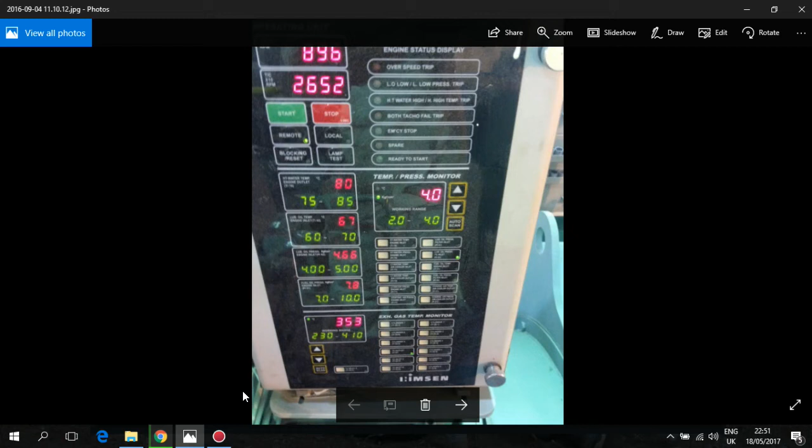Today it's 18th of May and I have this video for you. These photos were sent from my dear friend Radoslav from Bulgaria, and they're very nice pictures because this kind of local panel I have never seen, my dear friend. It's very nice to see the future in front of my eyes.

And it's very nice, this panel, because it's more durable. There are no pressure indicators shown by gauges. It's more durable, this kind, but I don't know in the future with the high temperature how this monitor will go. Only this electronics is sensitive to high temperatures, humidity and vibrations.

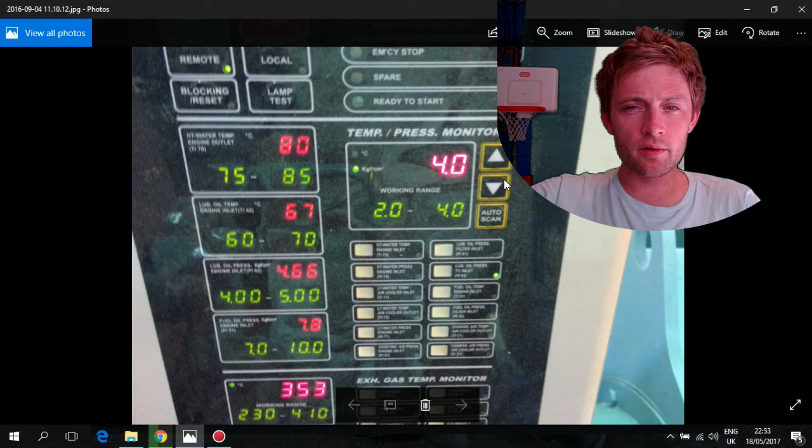As we can see here, you can also control the temperatures and pressures from here, from these two buttons. And now also it's in remote control. That means everything is in automatic, and we can see the temperature, which is 80 degrees and has variation from 75 to 85.

Lube oil temperature engine inlet is 67, and the range is 60 to 70. Lube oil pressure, kilograms per square centimeter, engine inlet is 4.66 and the range is 4 to 5. In the old ones, gauges had a small indication with a green area, which means that this is the proper operating pressures and temperatures.

But here also with green you can see very nicely the working ranges. Here down it's more clear, it says working range. It's very nice this. Also you don't need to see with your eyes how much the pressure or the temperature is. This one is better.

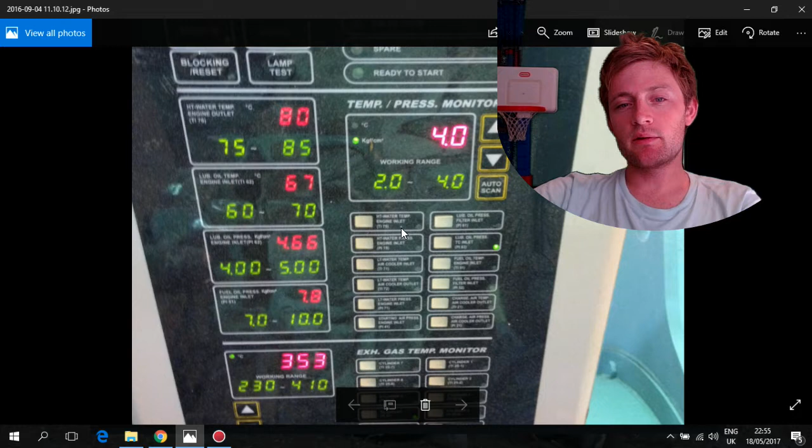Also, what is this? Lube oil pressure, temperature, inlet. If we have a lamp here, this is green color. That means in this panel here we see the lube oil pressure at the turbocharger inlet. And as we change here up or down, we can see different information. It's really nice to see something like that.

Thank you very much, Radoslav. Thank you very much, because it's a very nice opportunity to see the future.

And RPM, I see RPM is 900. Very nice, very strong diesel generators. Turbocharger speed is 2652 multiplied by 10, that means 26,520 rpm. The engine is at load.

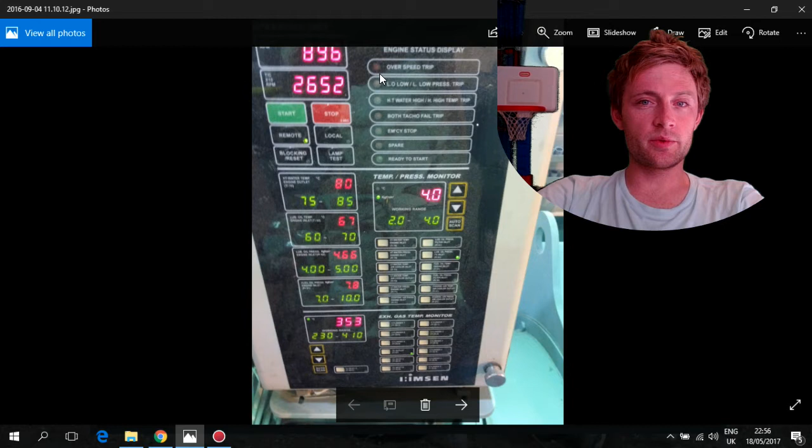Also we have indication of engine status here. We can see some lamps which indicate some status of the engine. If overspeed occurs, the engine will trip and this lamp will be lit. Okay, let's move on to another picture, but very nice. I like it. You will tell us in the future what you will face with that system.

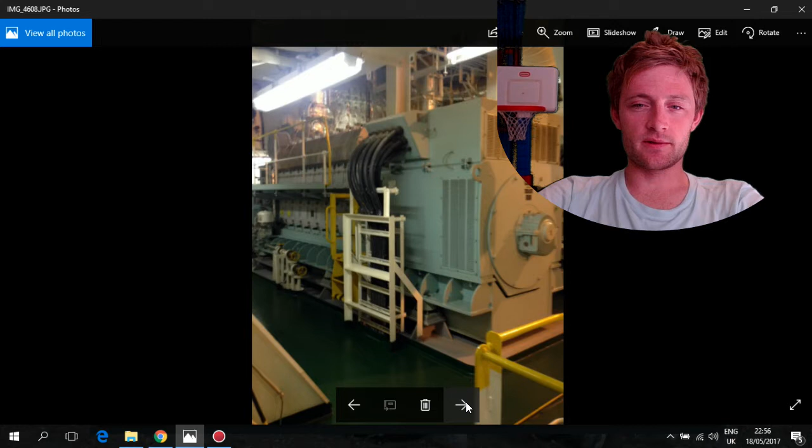And this is the generator from the outside, from far. As you can see, there are a lot of cylinder heads here. How many? 1, 2, 3, 4, 5, 6, 7, 8, 9. Maybe it's 9. Himsen made. They're all the same type, only the size changes.

From here I can determine these two valves are from the lube oil purifier, the inlet and the outlet. And also I can see this is the centrifugal filter here, this side. It's very good to have a centrifugal because most of the impurities will be removed there. Here these are the lube oil filters, also this side, and the air cooler is here.

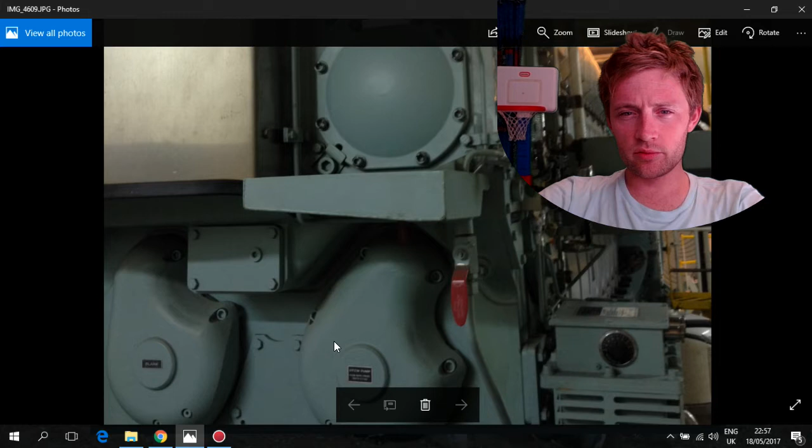They changed the design a little bit. These covers they made more beautiful. Sure, the design will be more detailed now after a lot of years of running this engine. As I know, these engines have already passed maybe 15 years, maybe more. From 2006 I have seen them installed in ships

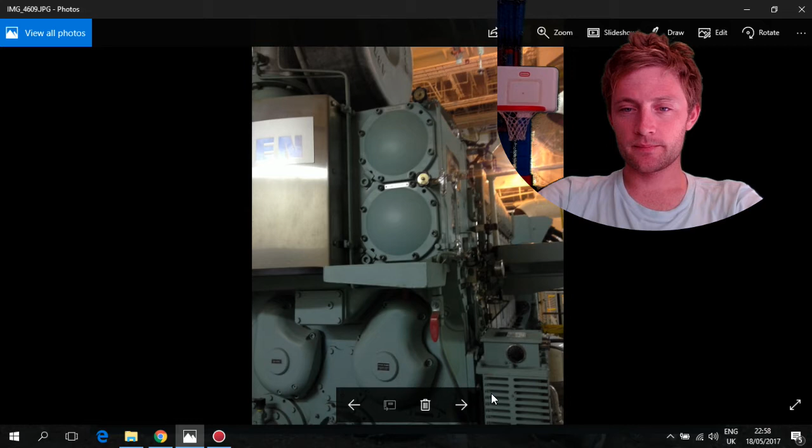as auxiliary engines. This is the preheater here for the water, the electrical preheater of the generator, and these are the centrifugal pumps here for high temperature and low temperature water.

These filters, the upper and the lower, are interchangeable. You can change them if the alarm comes, the low lube oil pressure alarm, maybe set at about 3.8 or 3.6, 3.5, something like that, maybe lower. If the alarm comes, you change to the other filter, but be careful because sometimes the filter changeover is not done properly and some of the oil keeps passing and will not stop.

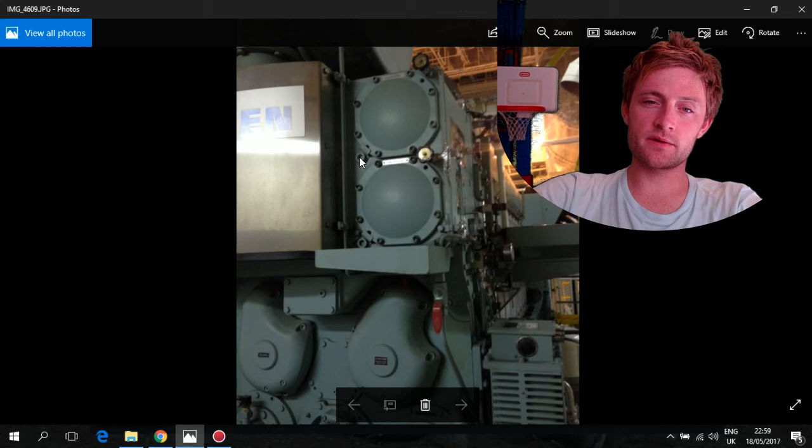First open the vent. Let's say the upper is dirty, you change to the lower filter, and you open the vent. If you see that the oil stops, it's okay, you can open this bolt here and remove the last remaining oil inside.

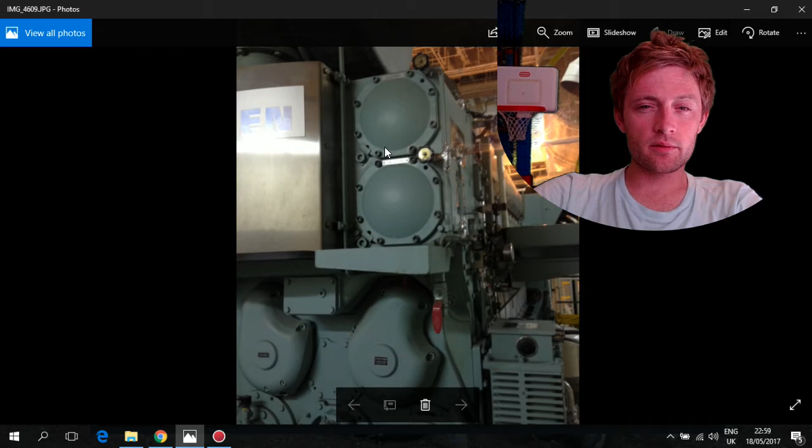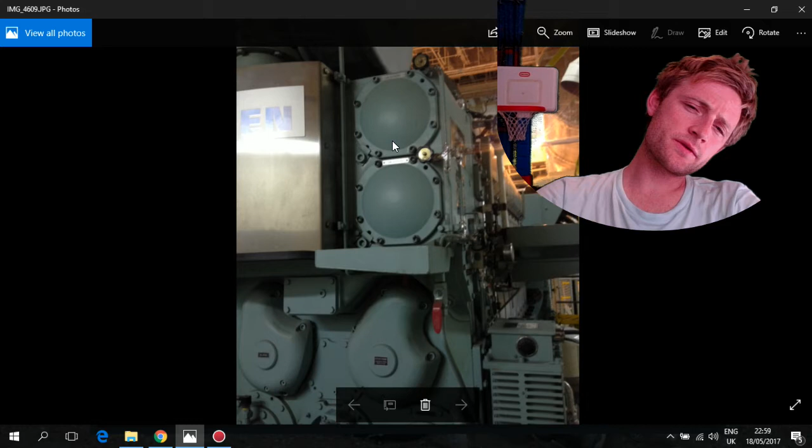But if you are not sure about that, it's better to start another engine and stop this one, because if air comes inside the system, maybe this engine will stop or trip by low pressure, and then a blackout will take place. It's better to start another generator and make your job easier and safer.

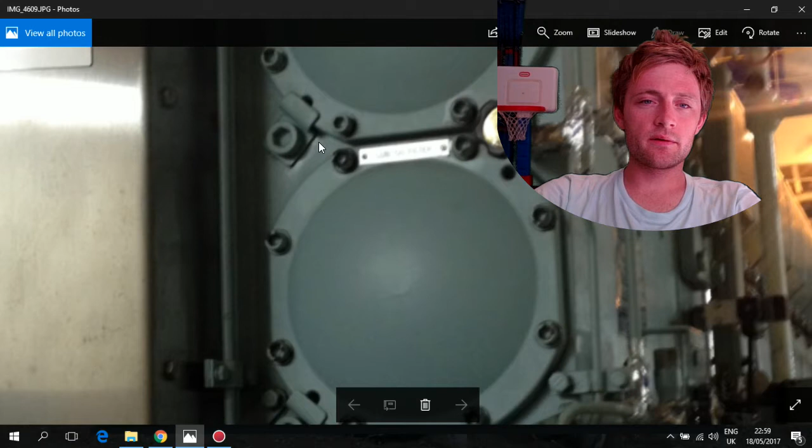Okay, here in this nut there are some O-rings which need to be changed sometimes. Maybe if you replace about 5 or 6 times, you need to change these O-rings, because if you don't change and tighten, leakage may occur here. Also here in this cover, there is also an O-ring which also needs to be changed.

These filters inside: there is one metal filter inside which you can clean in ultrasonic with chemicals, and the other filters with paper cartridge you cannot clean, because the paper absorbs all the dirt and impurities inside, and it's better to throw them. I heard one time from one chief engineer, he said to clean these filters and put them back again, but no, never do that, better replace. Okay, these are paper filters, never do something like that.

Here is the changeover, the interchange, and there is also a special spanner. Okay, if you have an adjustable, you can use it. There is also a lock nut here, but it's better to use the special spanner for this case. This spanner on one end is big for this place, and the other end is for the fuel filters, to change them more easily.

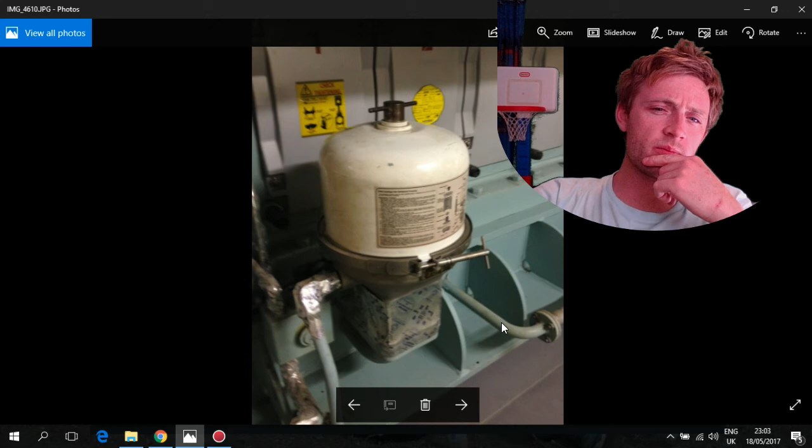And it's better to clean them, if you run the purifier there every time, let's say this is your generator which you run this month and you also have a purifier on this generator and it's working, maybe it needs to be cleaned about once per month, it's enough. Do not be so crazy as to clean these centrifugal filters every time, because the purifier is also there along with this centrifugal.

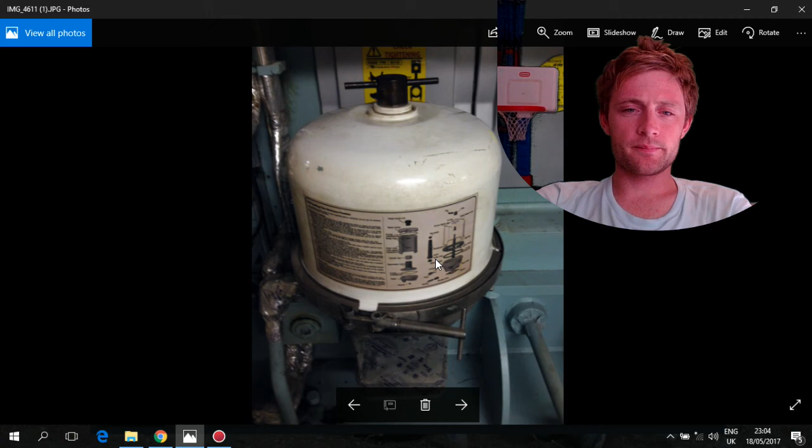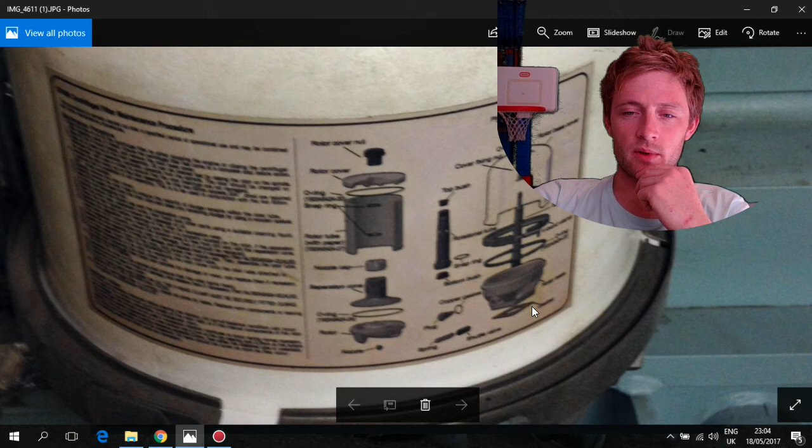Okay, this is another view. Here we can zoom and see the O-rings. There is one O-ring up. This is the inside part, this one here. 1, 2, 3, 4, 5, maybe 6, about 6 O-rings. This one is at the bottom of this device, which you never touch, and it's very durable.

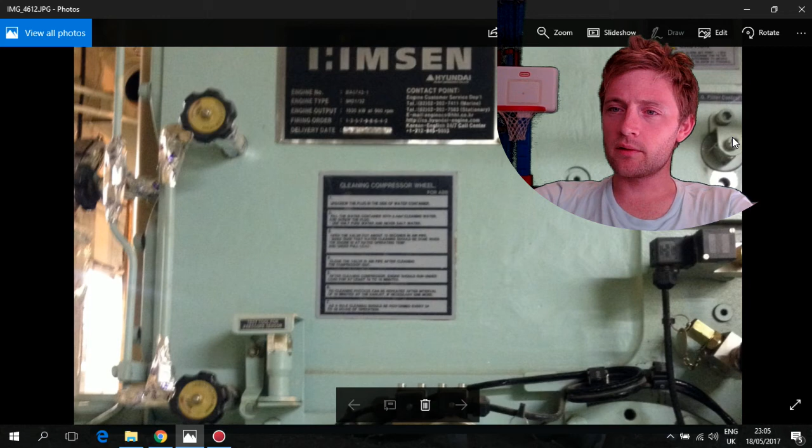Everything is explained here. Also, I believe the kit must be somewhere here. The numbers of the kit may be right in there, because in the book maybe you will not find them. And the kit comes with all the O-rings included. Okay, this is here. As you can see, there is also a lock. This is very good, it is locked. Lube oil filter cartridge to change: you remove this lock and then put on the special spanner.

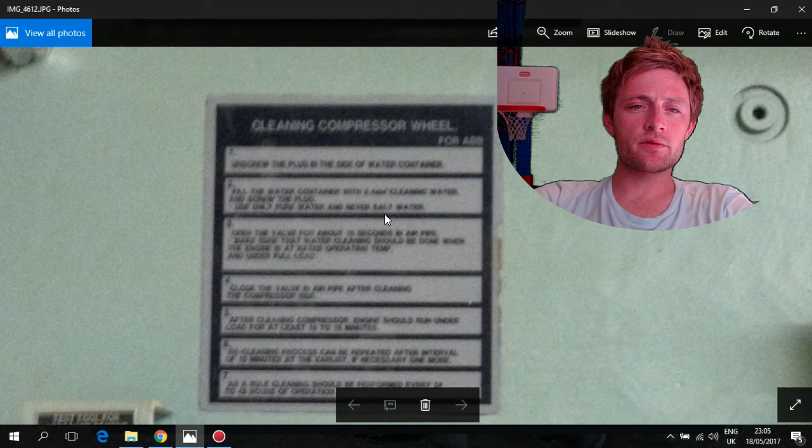And here there are instructions on how to clean the compressor side of the turbocharger. There is an instruction, and also, as I can see here, a 9-cylinder engine, a very big, very strong engine. And we have the firing order here. From here you can see which cylinder comes next.

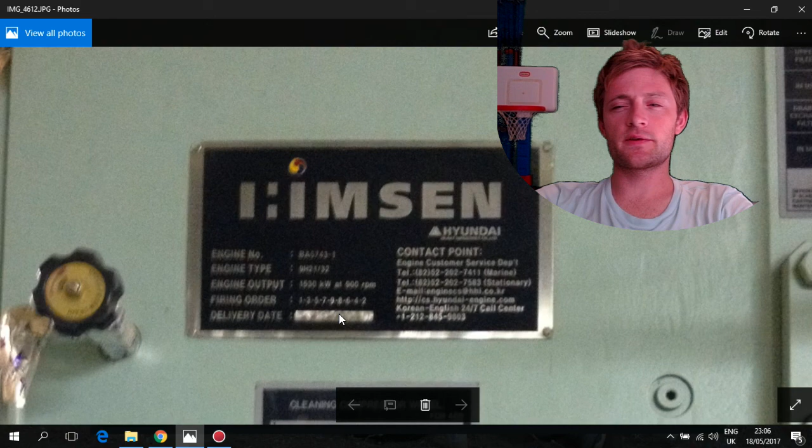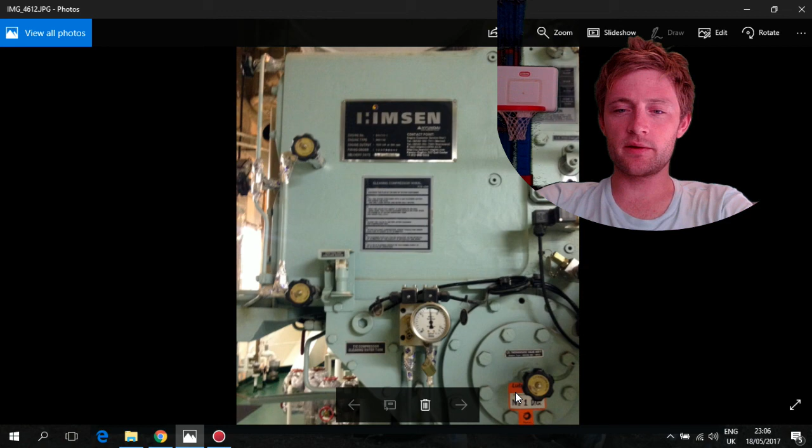When you do an overhaul or measure something, like deflections, or adjustment of the exhaust valves and inlet valves. And here is the indication of which filter is in use: lower, upper, or both. Very nice engine. Here on this side are the lube oil thermostatic valves, which also state the engine type and the range.

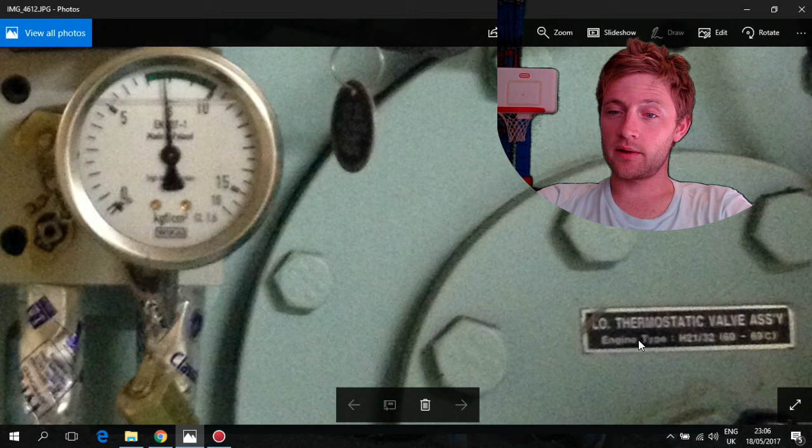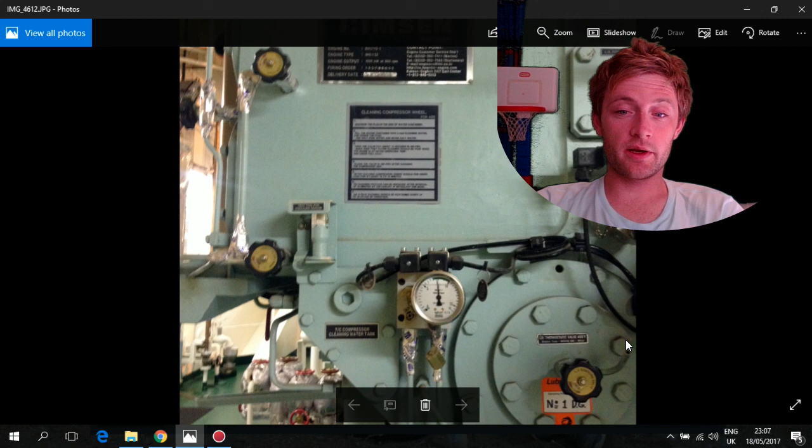Be careful, do not mix the lube oil thermostatic valves with the jacket thermostatic valves, because they look the same outside, but the range is different. You can determine this range on the thermostatic valve. Check very carefully so you don't make this mistake.